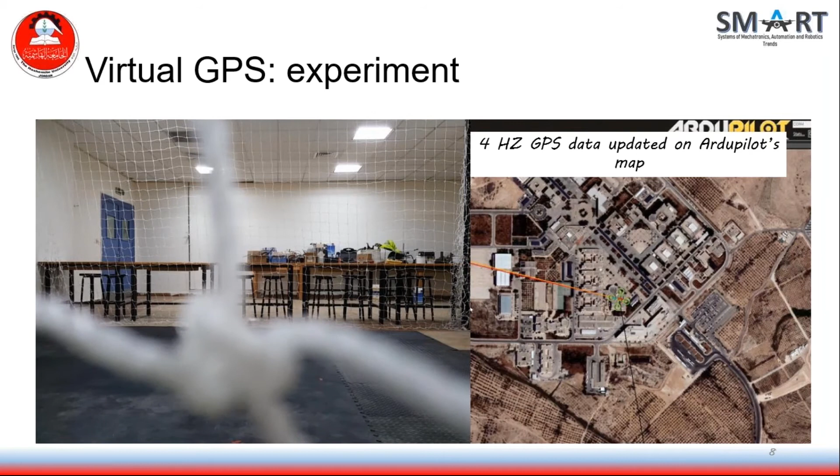In this experiment, the quadcopter was running on a loiter mode that keeps the lateral position fixed, while the vertical and lateral positions could be controlled by the RC transmitter. First, the quadcopter takes off automatically from home point, then the altitude changes based on commands from the user.

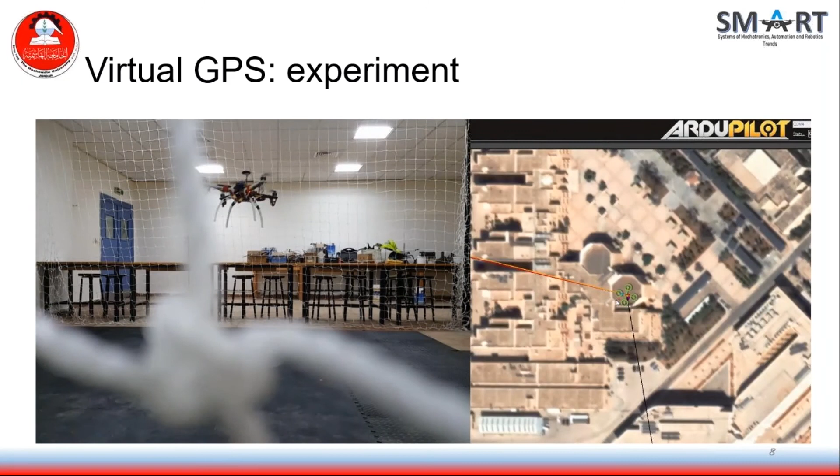The midpoint of the OptiTrack flying system was set as a reference point, so the location of this point was defined approximately through Google Maps. Time-based GPS data, along with other flight information, were stored in the autopilot SD card in order to analyze aircraft performance and to debug errors.

When you are evaluating your system on a quadcopter for the first time, you always keep in mind the margin of unpredictable behaviors of the drone. This explains why we recorded the video behind the protection nets.

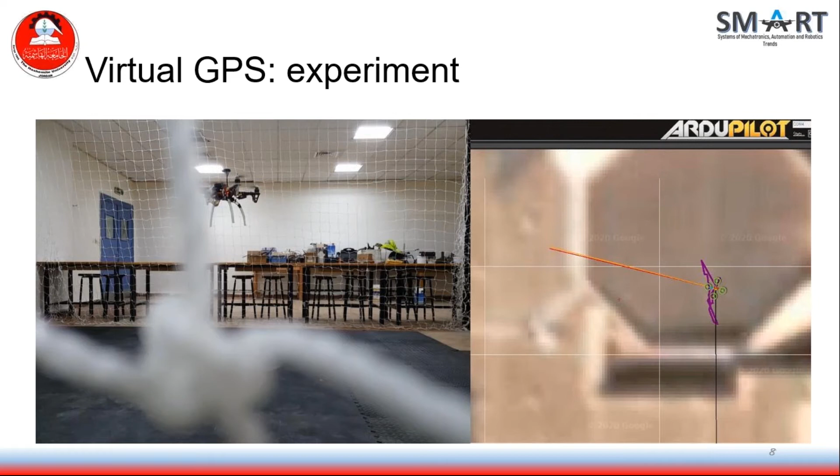Another submitted work whose results were verified in the lab before going to outdoor tests was about accurate state estimation and velocity drift compensation using complementary filters for a quadrotor in GPS drop regions. Using low-cost sensors in UAVs such as quadcopters requires the design of a robust filtering system to compensate for noises and biases.

Moreover, the coupling dynamics between the angular movements and the translational movements leads to deviations in the quadcopter's path due to the presence of biases in measurements. Usually, the estimation of quadcopter angles is calculated according to the tilt in the gravity vector, which is represented in body coordinates. However, the accelerometer readings are affected by forces such as blade flapping and drag forces that affect the estimations. Accordingly, failure to compensate for these forces leads to linear velocity drift, especially when the GPS signal is lost.

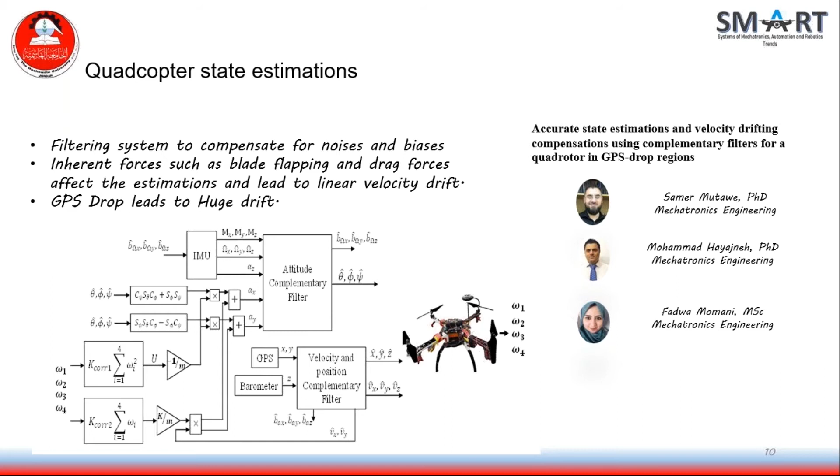Therefore, this work aims to design a filtration system using complementary filters that provides robust and accurate estimations of a quadcopter's attitude, positions, and velocities. In addition, the estimation system is able to compensate the velocity drift in the lateral directions through a new acceleration model. The effectiveness of the presented system has been verified and compared with the traditional complementary filters through several flight tests. The indoor tests were performed using the motion capture system from Quanser.

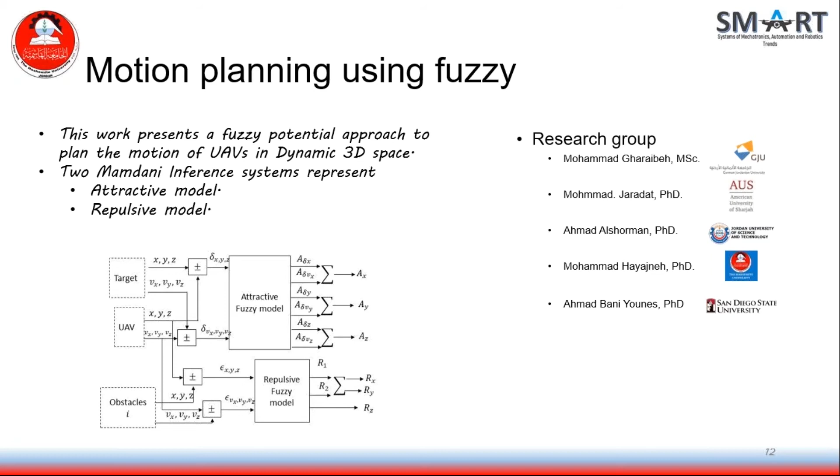The real-time experiments to verify the performance of the proposed control system were performed based on the robotics platforms with a motion capture system from Quanser. The robotic system solution consists of 2 quadrotors and 1 ground robot. In the experiments of this work, a QDrone quadcopter was adopted to receive path information from the fuzzy-based motion planner, updated at 10 Hz.

The updated path position allows the quadcopter to automatically track a moving ground robot, which is the target, and at the same time to avoid another moving quadcopter, which is the obstacle. The fuzzy-based motion planner receives real-time position and velocity information of all robotics platforms and runs a Simulink model on the ground control station computer.

To evaluate the drone's performance in tracking the ground robot and avoiding the obstacle drone, several scenarios were taken into account during the experiment. In one of these scenarios, as shown here, using this approach, the main drone can reach a stationary ground robot while encountering the stationary obstacle drone in its path. We see here how the main drone modified its path to avoid the stationary drone. The main drone can track a moving ground robot.

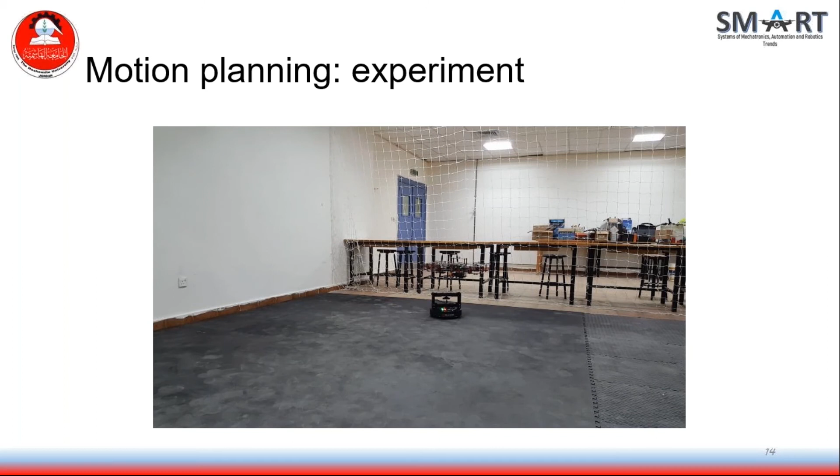In similar work, the effectiveness of a fuzzy neural-based controller was verified on a Pixhawk-based quadcopter in outdoor experiments. The main objective of this work was to develop the attitude and altitude control of a quadcopter using an adaptive neuro-fuzzy inference system, the ANFIS controller. The second objective of this work is to create a systematic framework for implementing flight controllers in embedded systems.

To show the effectiveness of the ANFIS approach, the performance of a well-trained ANFIS controller was compared to a classical PD controller and a tuned fuzzy logic controller. Comparing ANFIS with PD and fuzzy controllers, simulation results have clearly demonstrated the feasibility and effectiveness of the proposed control approach in terms of reference tracking and disturbance rejection.

This work went beyond simulation to practical application of the quadcopter, where a complete flight system is designed and implemented in a Pixhawk autopilot using a PX4 Simulink support package. The flight system contained ANFIS controllers, attitude and position estimations, and vision-based precision landing algorithms, which are successfully deployed in the autopilot. Several flight tests were conducted, and the results showed that the controllers performed perfectly in achieving the attitude and altitude stability of the quadcopter.

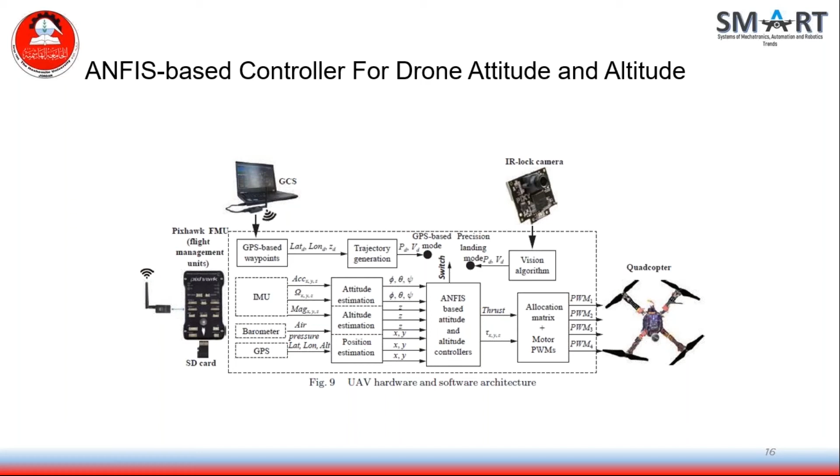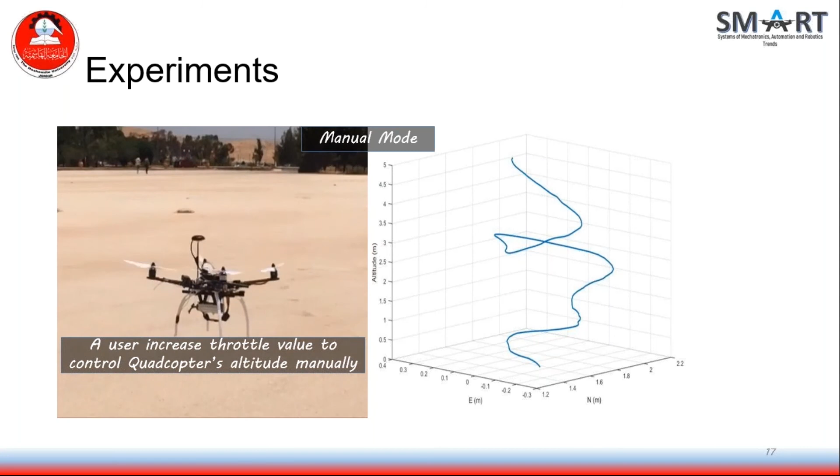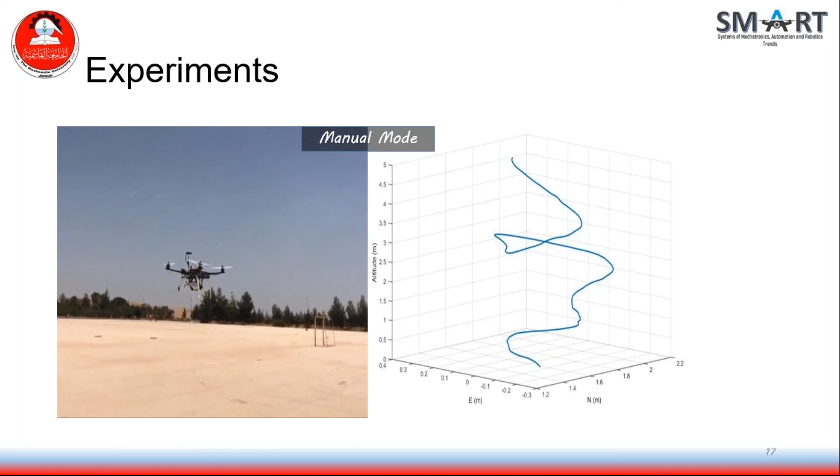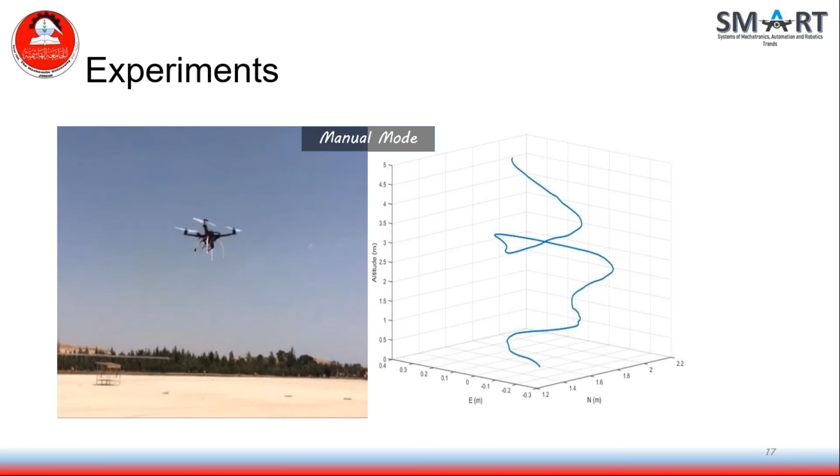First, the ANFIS-based attitude and altitude controllers were tested in manual mode, where a user sends commands by a remote controller to control the position of the drone in space. The commands in manual mode are the throttle signal to control the altitude, and the roll, pitch, and yaw angles to control the drone attitude. The figure illustrates the flight path of the quadcopter.

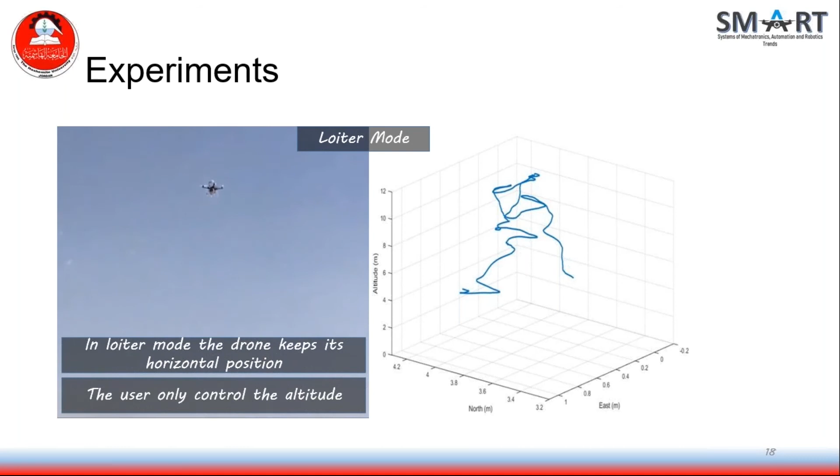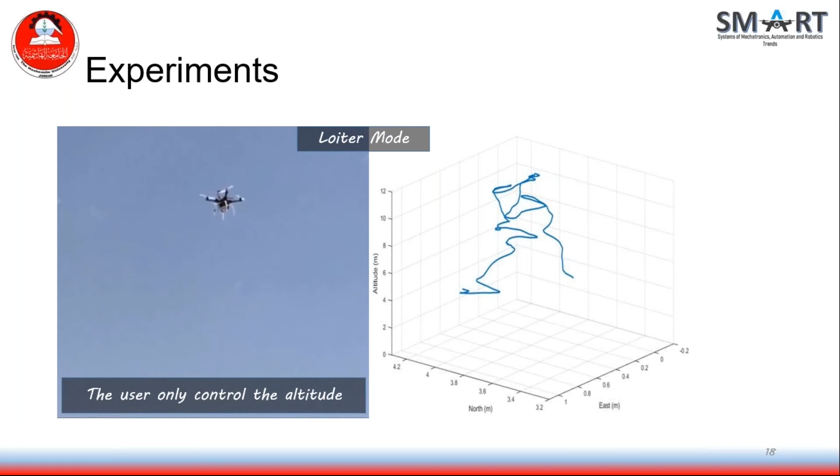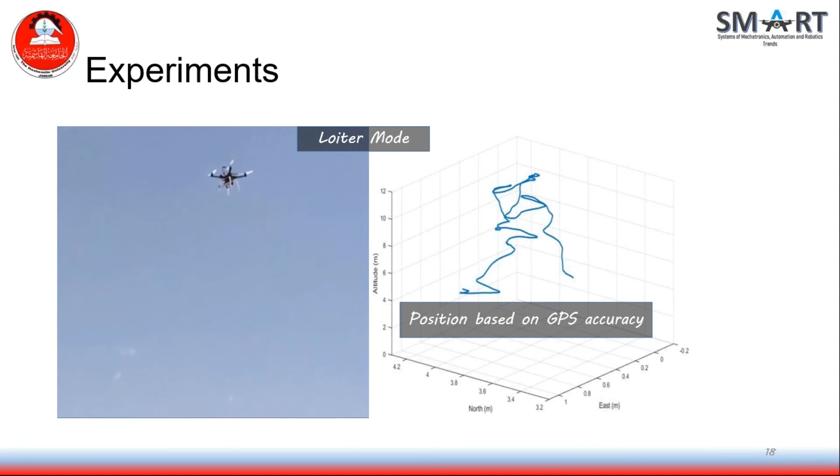Secondly, the drone's performance is tested in loiter mode, where the drone automatically keeps its horizontal position based on GPS locations, as well as holding its altitude based on barometer estimations. In this mode, the position controller sends the desired angles and height commands to the attitude and altitude controllers, which keep the drone hovering over a certain point. In this case, the attitude and altitude controllers are primarily responsible for maintaining the drone's balance.

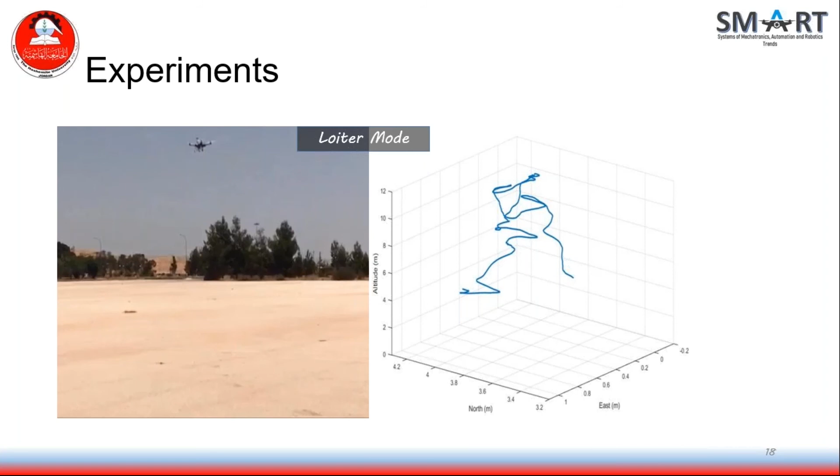One of the audience members is asking that in slide 2, you've connected a drone with the car, and they wanted to know what was the point of that. Okay. Yeah, I see. Here we represent recharging the drone's battery via a charging dock mounted on a solar car. The goal here is to enable the drone to perform several tasks per day in remote areas. Currently, we are implementing a new idea for the charging process. We do this on the system provided by Quanser, since the drone has a lower camera that enables us to validate the precision landing process which we need to perform in outdoor applications.

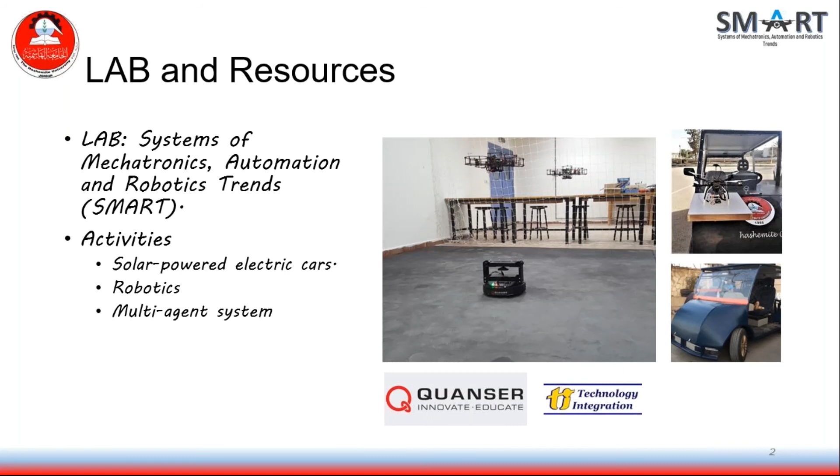Thank you. In one of the projects that you demonstrated, you talked about micro irrigation and smart agriculture. What is the role of the drone in this particular project? Okay. Initially, the project idea revolves around placing wireless sensors in the ground to measure some vital soil properties such as humidity, temperature, and salinity. This in turn will give us an impression of the plant's actual need for water with the optimal amount. The main target of the drone will be collecting data from these sensors and sending it periodically to the ground station for

processing. Another goal is to perform spectral imaging that provides more information about the plant's growth. As I said, this project is funded by the Royal Academy of Engineering, and it's for 2 years, and we just started with this project.

Thank you. One of the attendees is wondering if you used ROS for any of the development, and if you haven't, what was the development platform or software that you've used?

Do you mean the robotics, the ROS? The robotics, yeah, just in general, I believe the question is more generic. For example, in this one, did you use ROS, or was there any other software platform?

Yeah, we did a similar version with this work, which is the virtual GPS design using the OptiTrack system. But in this version of this work, we tried to make a code using Python and Raspberry Pi. So we take the benefits from the QUARC toolbox, which helped us a lot with the communications and to connect the third-party platform, which is the Pixhawk.

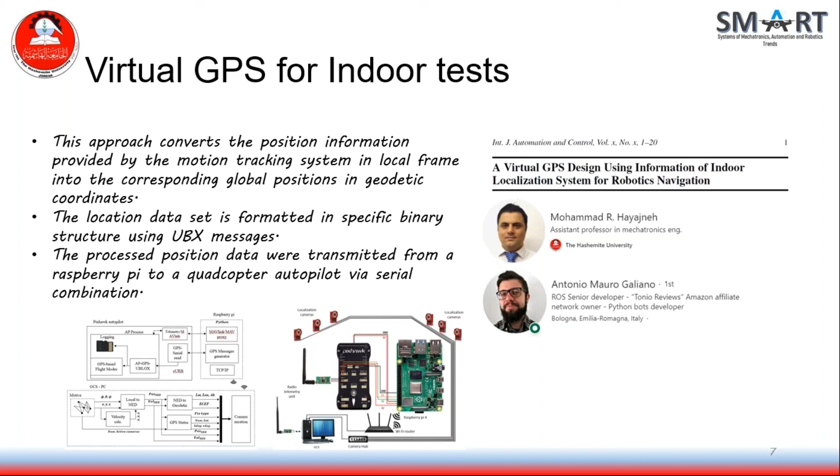Okay, thank you very much. One of the audience members is asking about the vertical takeoff of the quadcopter. Are you using the same controller you use for the rest of the flight, or do you have a separate controller just for the vertical takeoff? Which experiment, the vertical takeoff? They're not specific as to which experiment, but in general, when you've developed your controllers, do you have a separate flight controller that handles the takeoff?

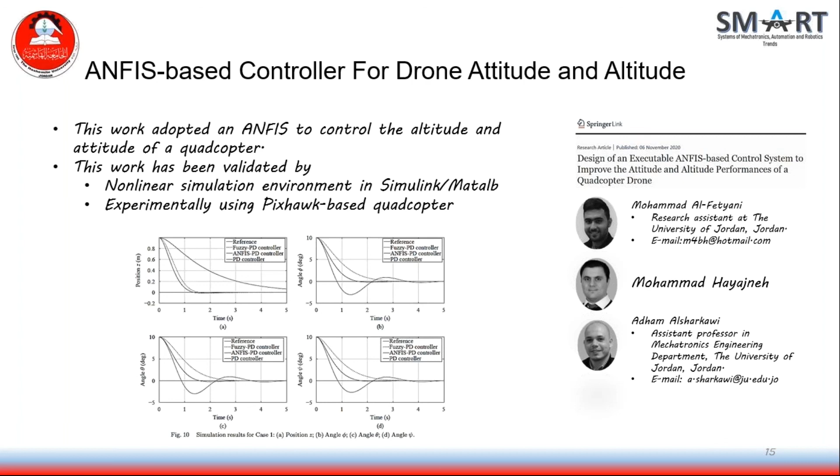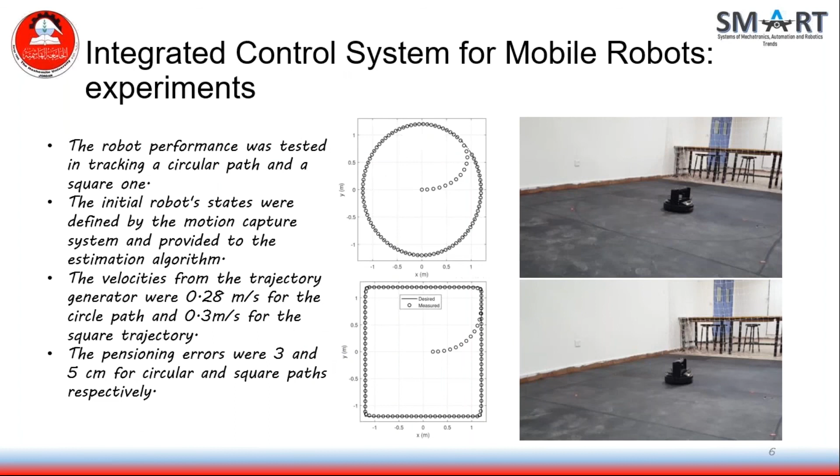Actually, one of the advantages of the system that was installed by Quanser is that it is considered a full solution that includes ready control and communication systems on Simulink, enabling you to essentially run this test. Of course, this will greatly help you in adding your own control system or modifying existing systems without the headache that comes from building the whole system from scratch. For example, in this work, the controllers and the ground robot, we created the new control systems, but the predefined communication system facilitated the accomplishment of the task.

Thank you. I have time for two more questions, Dr. Mohammad. In some of your work, you use fuzzy and neural-based control systems to control the drone. One question that always comes up is the computing demand. Could you kindly comment on that?

Okay, I agree that such systems require high processing and computing. Usually, we resort to such systems because they can solve some of the problems that result in other systems. For example, in the experiment of motion planning, the benefit of fuzzy logic is the absence of sudden changes between states. Also, it provides continuous execution, and it is free from the local minima problem. The path planning for robots is treated as a high-level controller that does not consider the dynamics, control inputs, motion constraints, and the duration of motion in order to reduce the computational burden on the embedded resources. The output from the proposed method can be provided at low frequency.